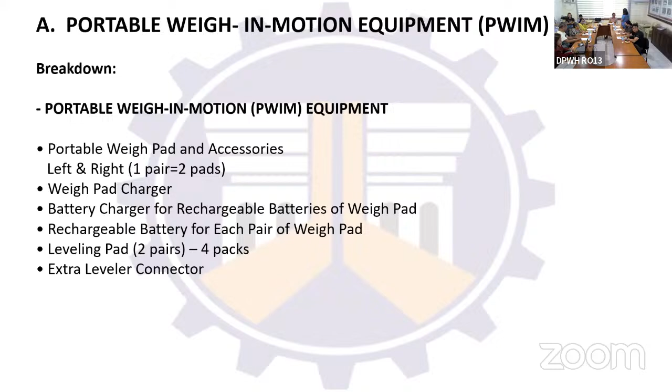ABC: 5,661,334 pesos. Portable Weigh in Motion Equipment, PWIM, specification is shown in the slideshow. Portable weigh control console and other accessories as shown in the slideshow. Laptop with WIM software, accessories as seen in the slideshow.

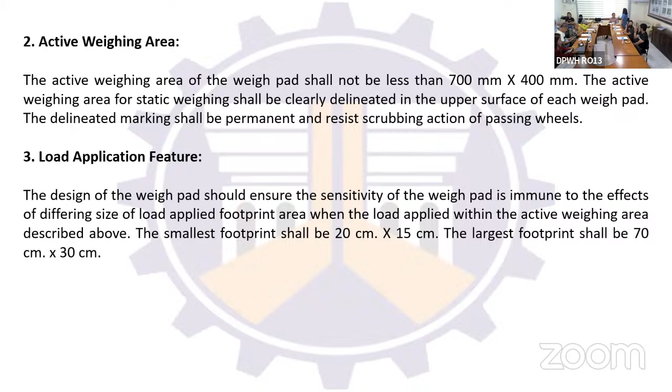Specification for portable weighing scales: weighing pad size, active weighing area, load application feature, weighing readiness, static and dynamic weighing, weigh pad levelers, connection to readout unit, weighing readout display as shown in the slideshow.

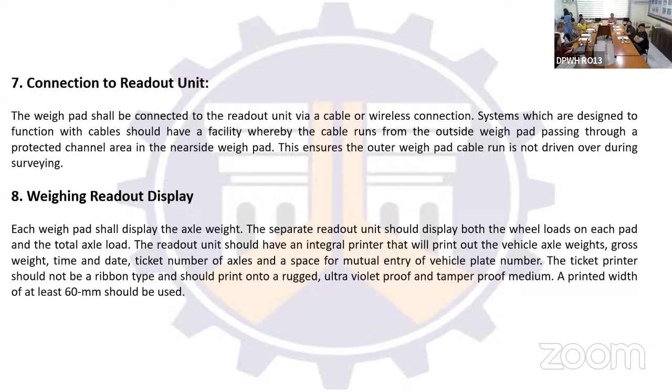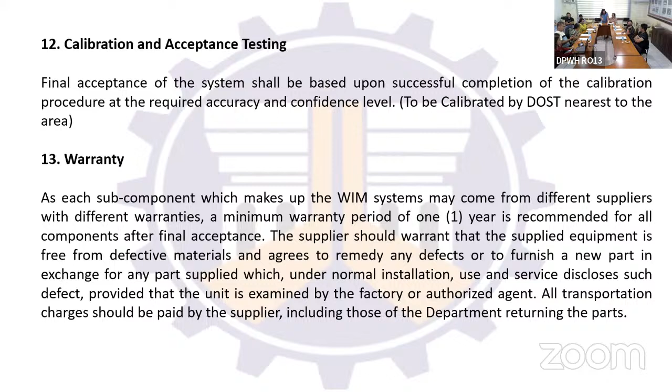The following are the minimum requirements for the readout unit: the printed information ticket, the data storage and communication facilities, the battery supplies, the delivery, storage and handling, the calibration and acceptance testing, the warranty. Note: total amount is inclusive of VAT.

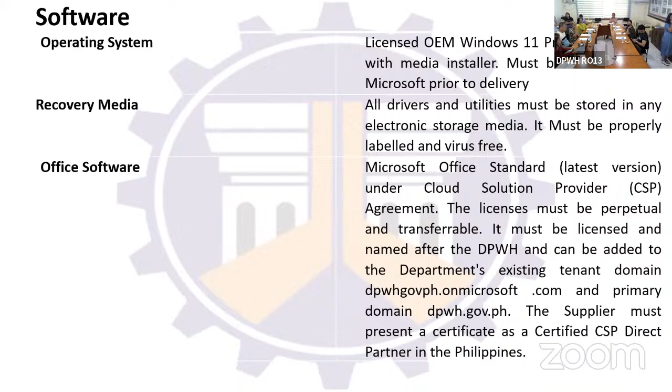Specification of laptop computer for administrative use as shown in the slideshow: software, accessories, and other requirements. That's all, thank you.

D24GN0007. Supply of diesel fuel.

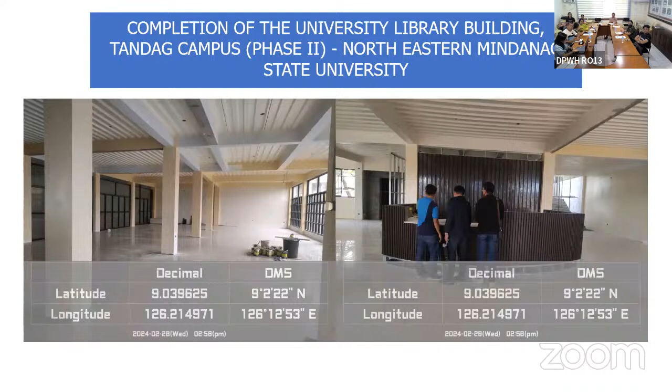This is the perspective of the university library and the actual site construction, including the vicinity map, site development map, ground floor plan, second floor plan, front elevation, rear elevation, right side elevation, and left side elevation.

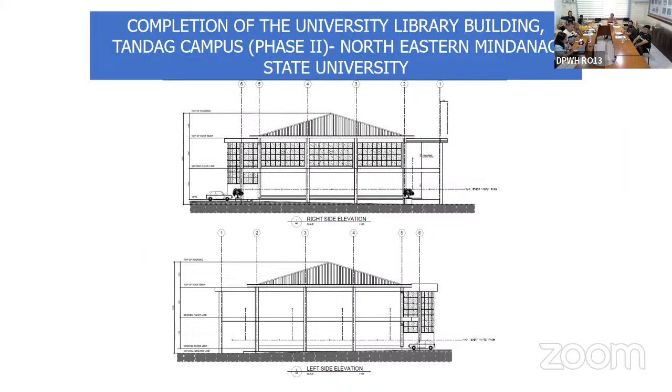Phase 2 schedule of doors and windows, second floor reflected ceiling plan, foundation plan for the extended PWD toilet, second floor framing plan, roof beam framing plan, and for the powerhouse, structural details.

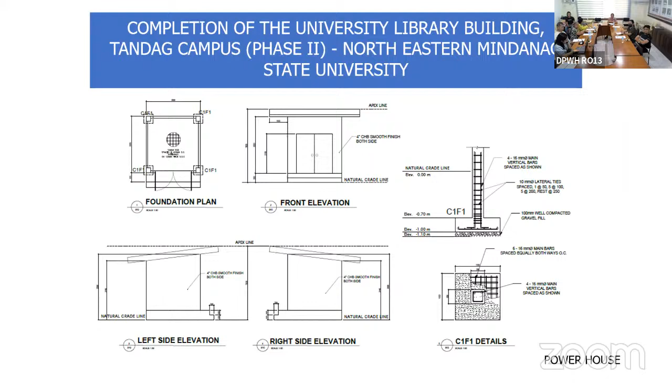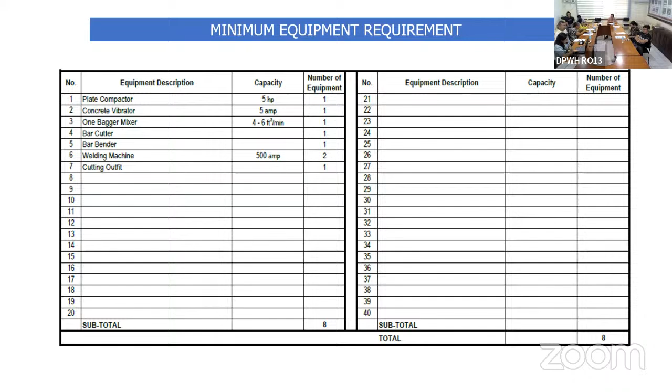Summary of quantities: we have part A, part B, part C, part D, part F, and part G. And for the minimum equipment requirement. That's all, thank you.

Any questions for this ID 24N00188?

So we do not have questions for this project. We proceed with ID 25N00004, Maharlika Highway, Agusan, Davao Section, station K1288 plus 979 to K1290 plus 000.

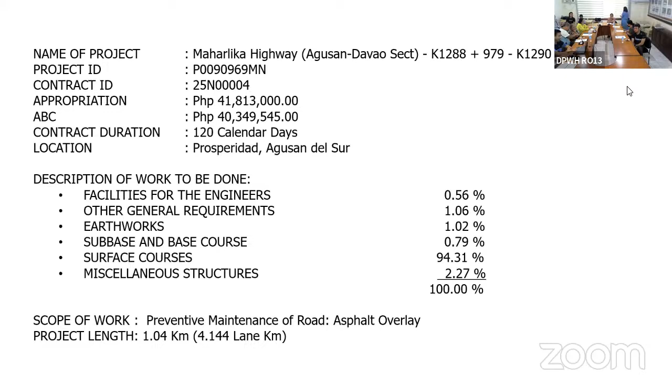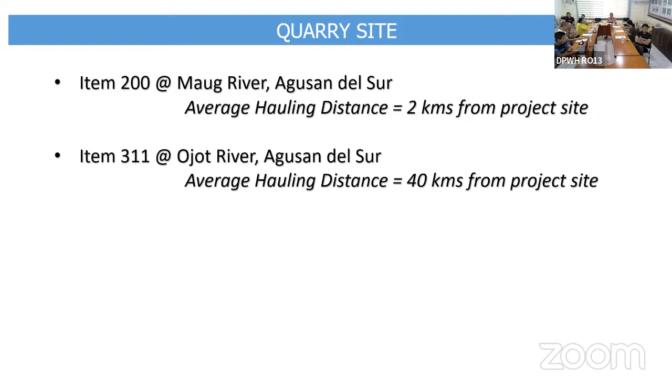The minimum equipment requirements. The quarry site, item 200 will be located in Maug River, Agusan del Sur, with average hauling distance of 2 kilometers from project site. Item 311 will be at Ojot River, Agusan del Sur, with average hauling distance of 40 kilometers from project site.

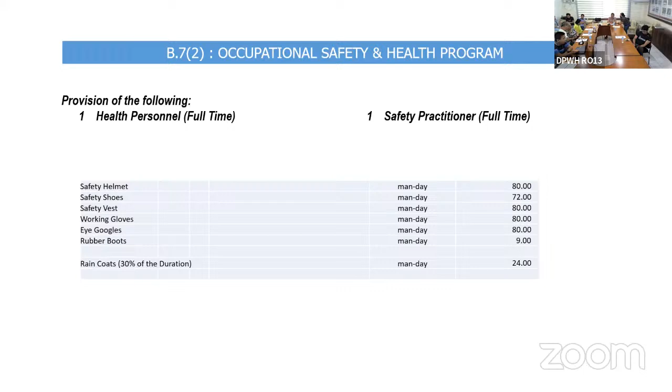Breakdown of facilities for the engineers: provision of field office for the engineers, provision of furnitures, fixtures, equipments, and appliances for the field office, operation and maintenance of field office for the engineer, project billboard, occupational safety and health program, traffic management.

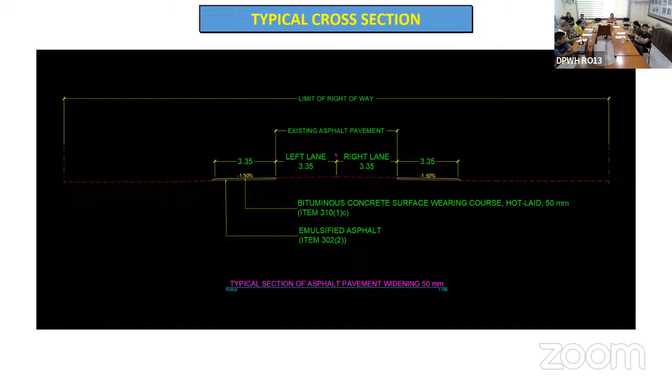That would be all. Thank you. Okay.

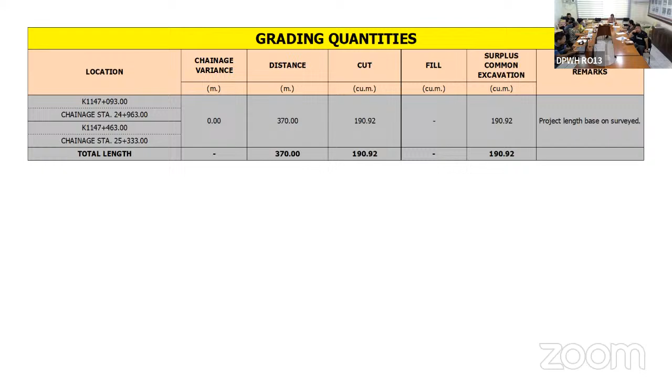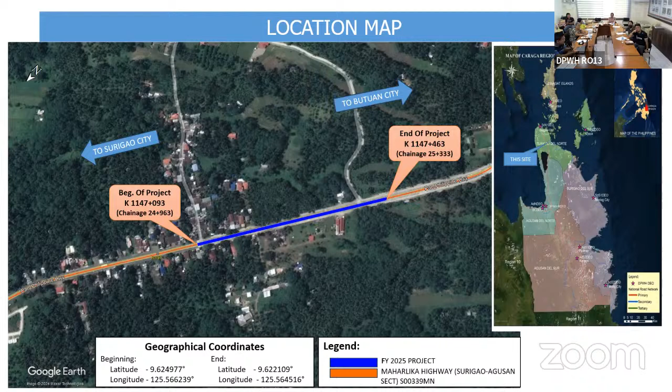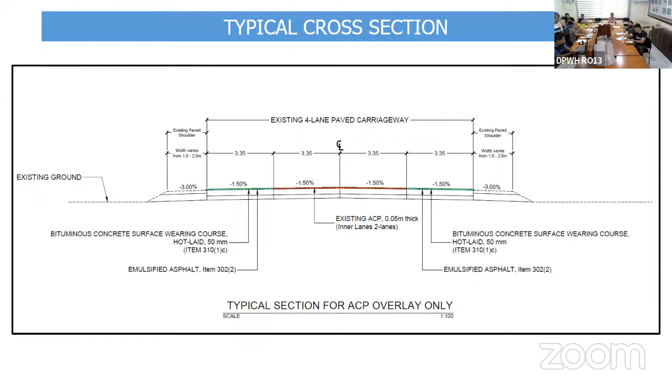The minimum equipment requirements. The location of the project, a location map. The typical cross-section for roads with reblocking and asphalt overlay. The typical cross-section for asphalt overlay only. The typical cross-section for asphalt overlay with paving fabric, installation for section with minor scaling. The straight line diagram.

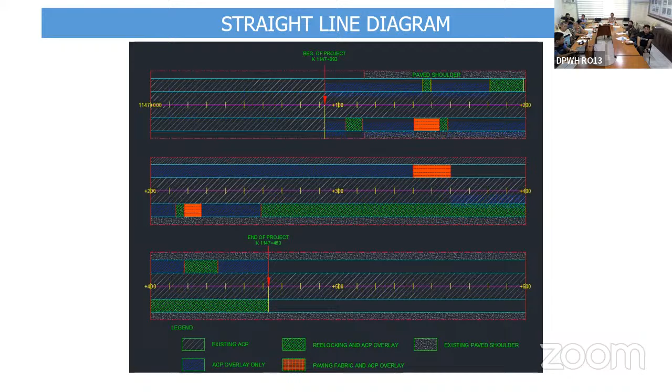The requirements for facilities for the engineers: provision of field office for the engineers on rental basis, provision of furnitures, fixtures, equipment and appliances for the field office, operation and maintenance of field office for the engineer, project billboard, occupational safety and health program, traffic management. Thank you.

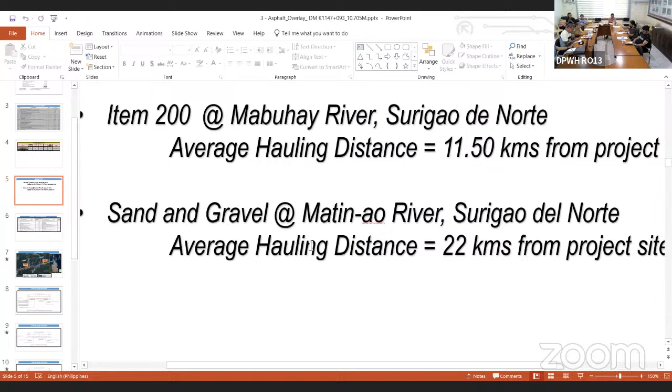The schedule for the bidding is October 24, so that gives them time from now. It's possible to make changes today. Inform them if there are changes needed, so we can issue a bid bulletin. It has still to be approved - the revised POW. Okay, any questions? Online and on site? Okay, so none, we continue. We proceed with ID 25. Thank you, sir, Engineer Bulat. Please proceed with ID 25 and 00070.

The fourth civil works project for roads: construction of bypass road, Bunawan to Veruela to Santa Josefa, Agusan del Sur. Project ID P009358381MN, contract ID 25N00070, appropriation 35 million, ABC 33,775,000, with a contract duration of 180 calendar days. Location: Santa Josefa, Agusan del Sur. Description of work for CW1: facilities for the engineers, 0.93%.

Other requirements, 1.57%. Earthworks, 56.41%. Sub-base and base course, 5.61%. Surface course, 14.58%. Drainage and slope protection structures, 1.96%. Miscellaneous structures, 3.14%. For CW2: earthworks, 0.28%. Drainage and slope protection structures, 15.52%, with a total of 100%.

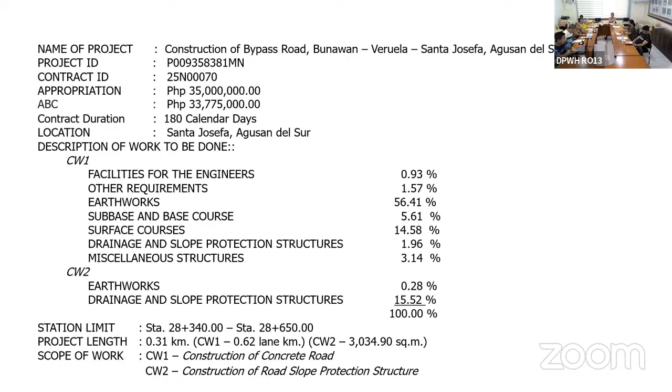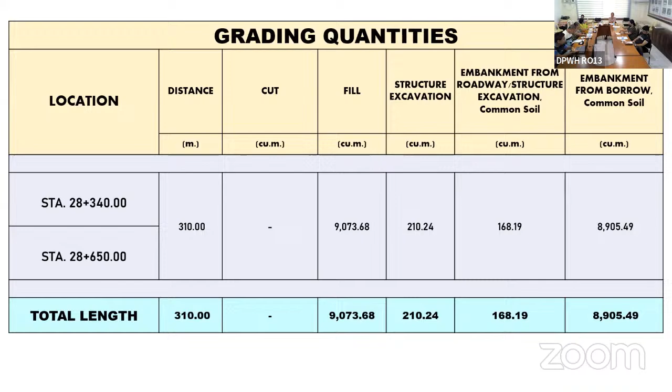This is the summary of quantities for CW1 and CW2. The grading quantities. The location map of the project.

Quarry sites: item 104 will be located at Candiis Mountain Quarry, Agusan del Sur, with average hauling distance of 15 kilometers from the project site. For items 200, 300, 505, 506, at Salvacion Bahayan River, Agusan del Sur, average hauling distance of 22 kilometers from the project site. Sand and gravel at Agusan River, Barangay Patrocenio, Agusan del Sur, average hauling distance of 11 kilometers from the project site.

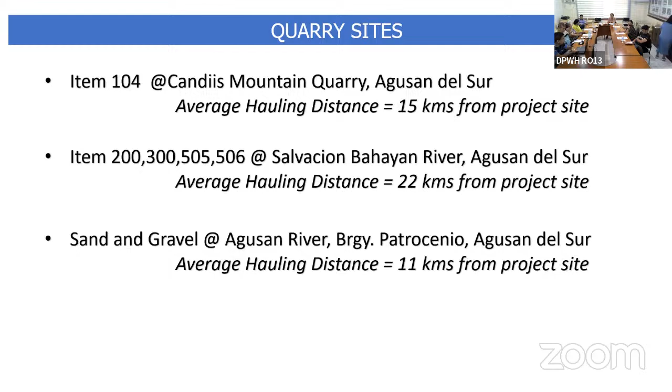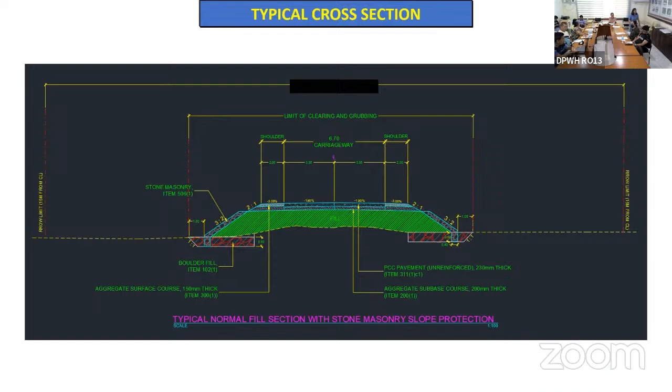The minimum equipment requirements. The breakdown for the facilities for the engineers: provision of field office for the engineers, provision of furnitures or fixtures, equipments, and appliances for the field office for the engineers, operation and maintenance of field office for the engineer, the project billboard, the occupational safety and health program, traffic management, the typical cross-section, which is a typical normal fill section with stone masonry slope protection. The traverse and profile. So thank you.

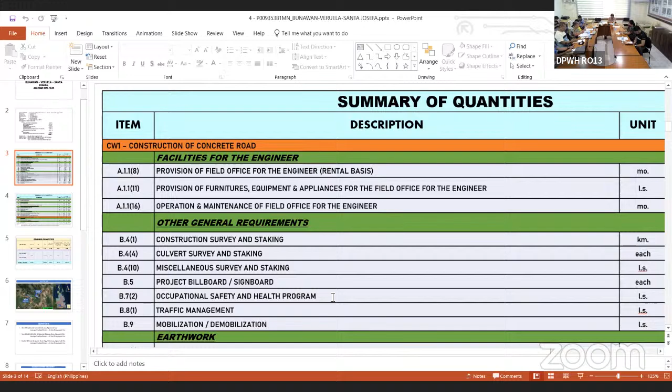Any questions from our board members? This is ID 25 and 0072, from our prospective bidders online and on-site. So, none, no questions. So thank you, sir. We continue with ID 25N00140, Bonbon Libertad Bypass Road.

Who will present? Bypass.

The fifth civil works project for roads: Bonbon to Libertad Bypass Road, Butuan City, with a project ID of P00910-108MN, contract ID of 25N00140, with appropriation of 40 million: 10 million for the off-carriageway, and 30 million for the right-of-way. ABC: 38,600,000; 9,650,000 for off-carriageway, 28,950,000 for the right-of-way. Contract duration of 90 calendar days, and the location of the project will be at Butuan City, Agusan del Norte. Description of work to be done.

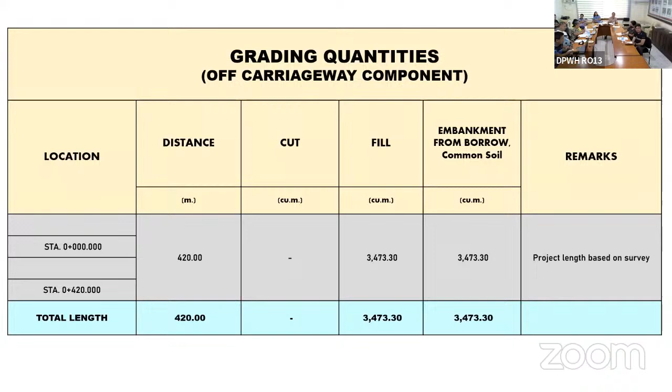Quarry site, sand and gravel will be at Kabadbaran River, Dinabukan section, with average hauling distance of 40 kilometers from project site. Item 1042A at Bonbon Mountain, Butuan City, average hauling distance of 6 kilometers from project site. Boulders at Tagibo River, Butuan City, average hauling distance of 21 kilometers from project site.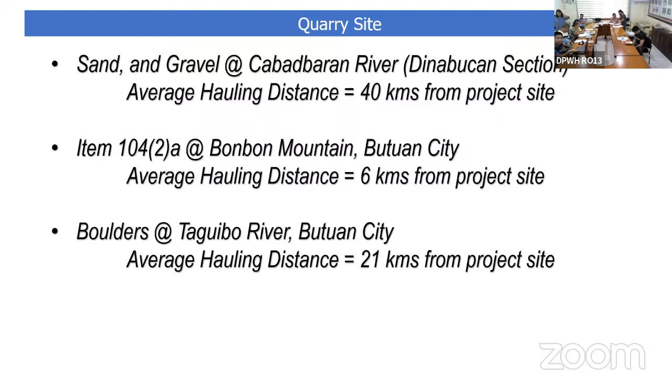Breakdown for the facilities for the engineers and other general requirements: provision of field office for the engineers, rental pieces, provision of furnitures or fixtures, equipments, and appliances for the field office. Operation and maintenance of field office for the engineer, project billboard, occupational safety and health program, traffic management.

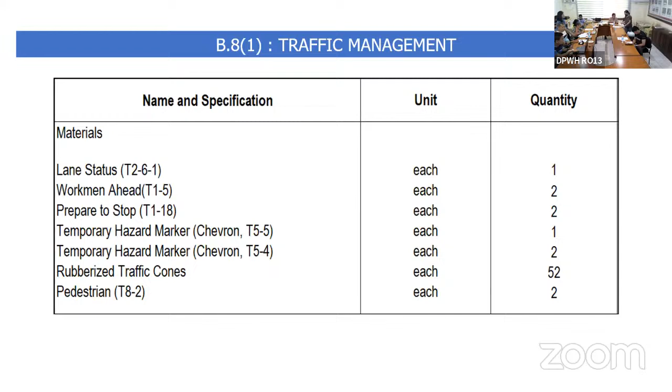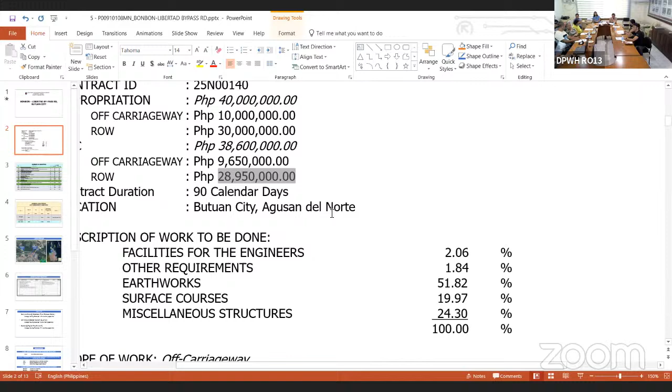Thank you, ma'am. Number 8.

For the next project, 24N00147 Patinay Bridge 1, B01739MN along Maharlika Highway, Agusan, Davao section. Project ID P00909984MN, appropriation 15 million, ABC 14,475,000, location Patinay, Prosperidad, Agusan del Sur. Contract duration 120 calendar days.

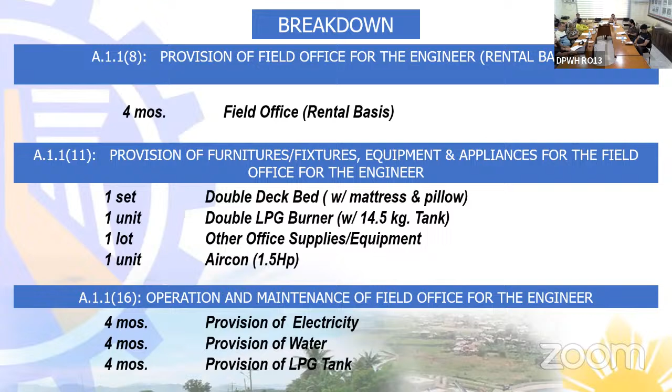For the breakdown, for the minimum equipment requirement, quarry site, item 104 and 200 at Maug River, San Salvador, with an average hauling distance of 13 kilometers from project site. And item 311-405 at Maasam, Agusan del Sur, with an average hauling distance of 56 kilometers from project site.

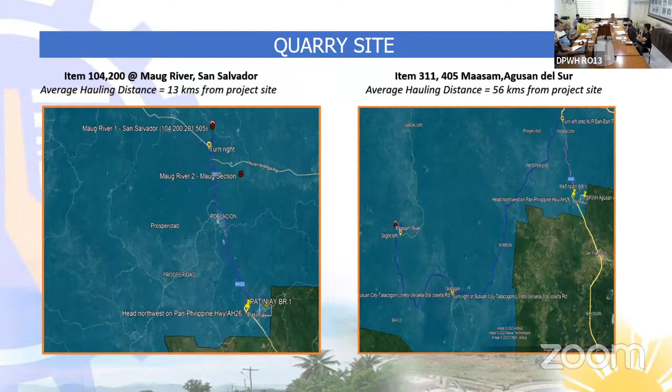Location map. For the general elevation. That's all.

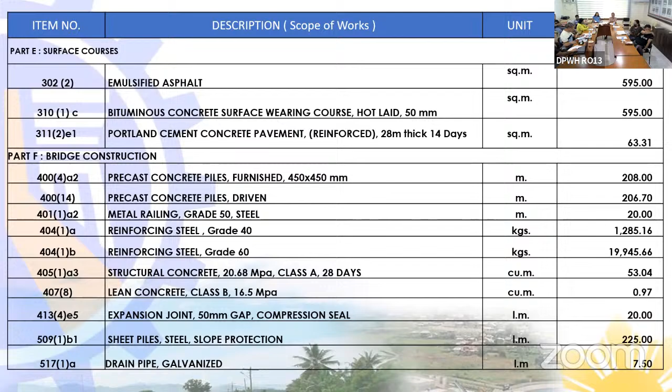Do you have questions from our participants, prospective bidders for Patinay Bridge 1? Okay, no question. So nag-iisa lang pala ang ating prospective bidder. Wala sa online, no? For Patinay 1, Bridge 1. Sa gawas, wala.

Members, any question, TWG? So, no questions. Next project, we have 25N00176, Simula Bridge.

For the last project, 25N00176, Simula Bridge, B00928MN along Maharlika Highway, Agusan, Davao section. Appropriation with 50 million, ABC 48,250,000. Location Bunawan, Agusan del Sur. Contract duration 210 days.

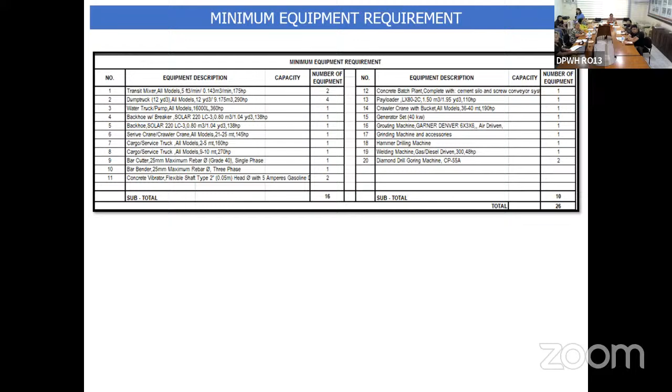Scope of work: rehabilitation, major repair of bridge at span 1 and 2 and first bridge approach. For summary of quantities, for the breakdown, for the minimum equipment requirement, bridge type, for the general elevation.

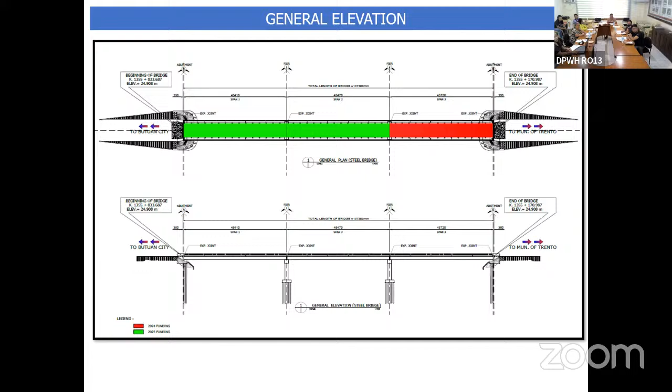Red ma'am is ongoing 2024. Yes ma'am, 2024. Training plan.

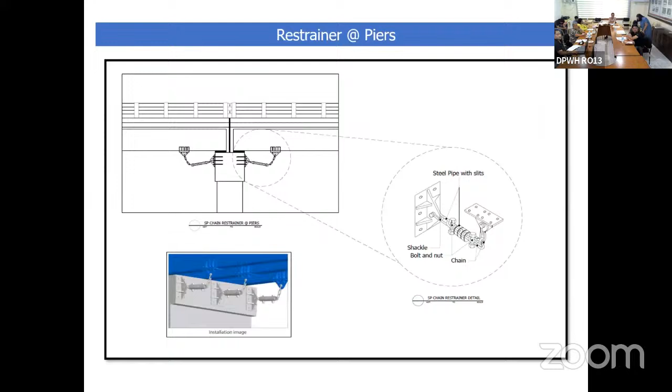This training. For the quarry site, Simula River, item 200 and 300, sand and gravel with average hauling distance of 19 kilometers from the project site. And for item 500, 505 and 506, Salvacion Bahayan River with average hauling distance of 22 kilometers from the project site.

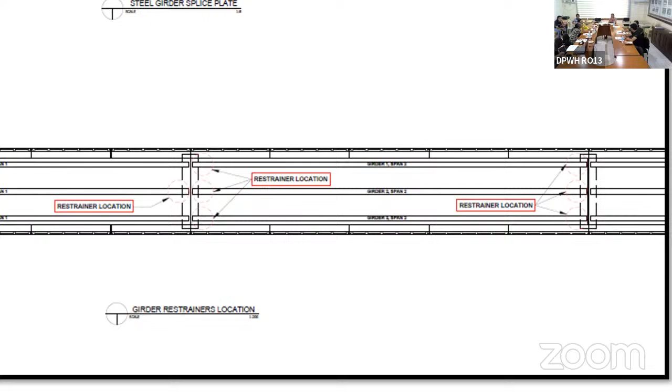Any questions from the body? None I guess. Ma'am, good morning.

Okay, from our online participant. I'm particularly interested in item 424-1, ma'am, the chain type bridge seating prevention restrainer.

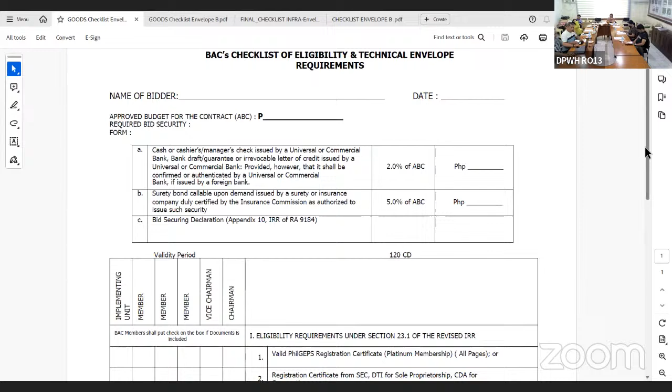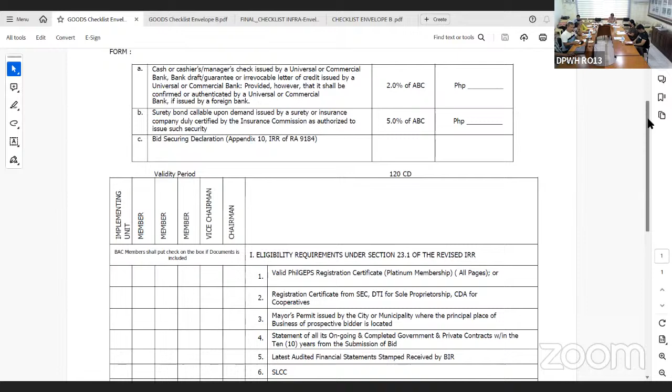the first requirement is the bid security, either in the form of cash, cashier's or manager's check issued by a universal or commercial bank, or bank draft or bank guarantee or irrevocable letter of credit issued by a universal or commercial bank for not less than 2% of the ABC. Or it can be a surety bond, callable upon demand, issued by a surety or insurance company, duly certified by the Insurance Commission, as authorized to issue such security, for not less than 5% of the ABC, or it can be a bid securing declaration.

For the eligibility requirement, this is for goods. Number one is a valid PhilGEPS registration certificate. It should be platinum membership. Number two is registration certificate from SEC, DTI for sole proprietorship, or CDA for cooperative; mayor's permit issued by the city or municipality where the principal place of business of the prospective bidder is located.

Number four is a statement of all its ongoing and completed government and private contracts within 10 years from the submission of bid. Number five is the latest audited financial statement stamped received by BIR. Number six is SLCC. Number seven is NFCC computation or credit line commitment. Number eight, valid joint venture agreement if they are engaged in a joint venture. And number nine is tax clearance.

For the technical document requirement, the bid security was already discussed. Number two is the conformity with the technical specification as enumerated and specified in Section 6 and 7 of the bidding documents. Number three is the omnibus sworn statement in accordance with Section 25.3 of the IRR of RA 9184, using the form prescribed in GPPB Resolution number 16-2020.

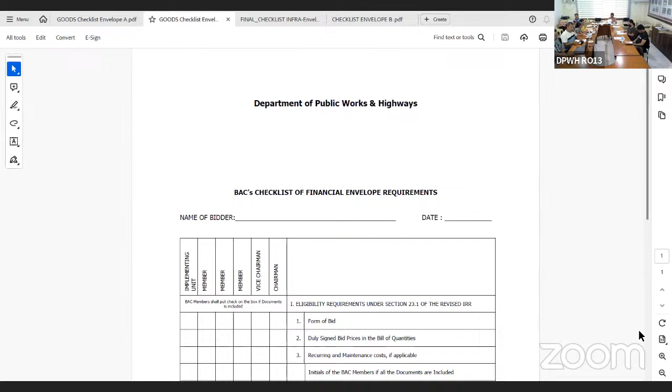For the financial requirement, number one is the bid form or form of bid. Number two is the duly signed bid prices in the bill of quantities. Number three is recurring and maintenance cost, if applicable. Take note again that any missing document in the above mentioned checklist is a ground for outright rejection of your bid.

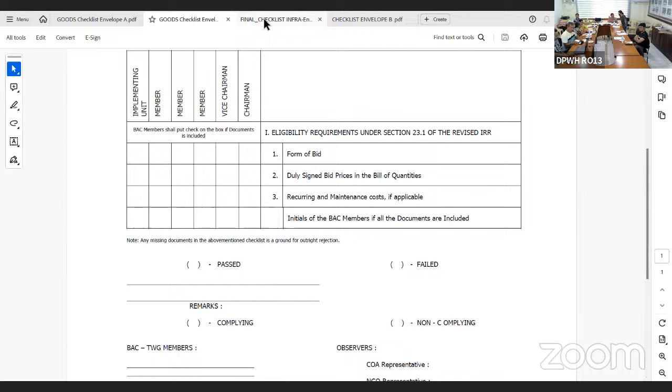For the infrastructure project, the following are the requirements. Number one is a PhilGEPS certificate of registration or membership; it should be platinum. Number two, if not enrolled in CWE, the following Class A and Class B documents not covered by PhilGEPS certificate should be submitted: number one, PCAB license and registration; number two, a statement of all ongoing government and private projects; number three, SLCC; number four, NFCC computation and a statement of total assets and liabilities; number five, a joint venture agreement, if applicable.

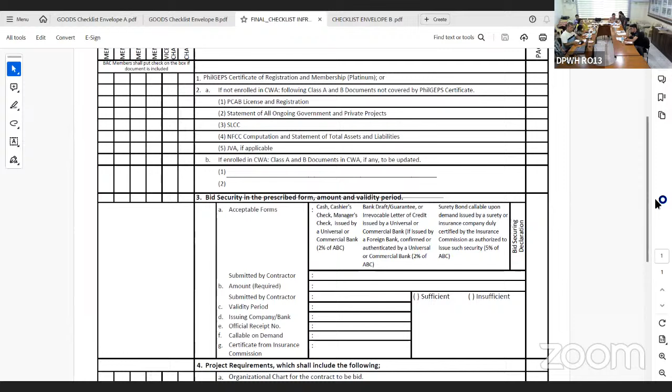If you are not enrolled in CWA... if you are enrolled in CWA, you should update your records in the central office in the Civil Works Registry.

For the bid security requirement, the following are the acceptable forms: it can be cash, cashier's check, or manager's check issued by a universal or commercial bank for not less than 2% of ABC. Or it can be a bank draft, bank guarantee, or an irrevocable letter of credit issued by a universal or commercial bank for not less than 2% of ABC. Or it can be a surety bond callable upon demand issued by a surety or insurance company duly certified by the Insurance Commission as authorized to issue such security, for not less than 5% of ABC, or it can be a bid securing declaration.

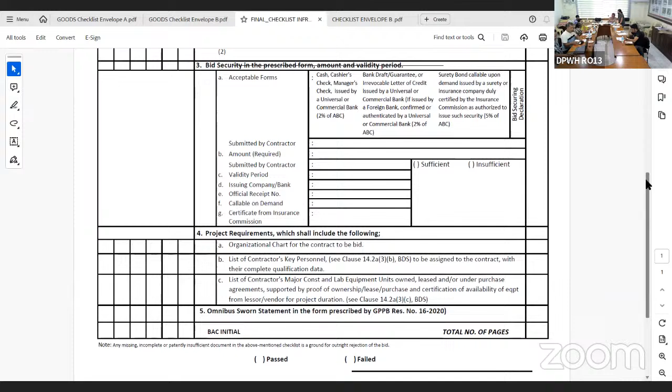For the project requirement, this includes the following: Letter A, organizational chart for the contract to be bid. Letter B, list of contractor's key personnel to be assigned to the contract with their complete qualification data - see Clause 14.2(a)(3)(b) of the bid data sheet. And Letter C, a list of contractor's major construction and laboratory equipment units, either owned, leased, or under purchase agreement, supported by proof of ownership, lease, purchase, and certification of availability of equipment from lessor or vendor for the project duration - see Clause 14.2(a)(3)(c) of the bid data sheet.

And number 5 is the omnibus sworn statement as prescribed by GPPB Resolution number 16, series of 2020. Take note that any missing, incomplete, or patently insufficient document in the above mentioned checklist is a ground for outright rejection of your bid.

For the financial component of your bid, the following are the requirements: number 1 is a duly signed financial bid form in accordance with the prescribed form in Section 9 of the bidding forms. Number 2 is duly signed bid prices in the bill of quantities. Number 3 is duly signed detailed estimates, including a summary sheet indicating the unit prices of construction materials, labor rates, and equipment rental used in coming up with the bid. Number 4 is a duly signed quarterly and monthly cash flow and payment schedule. Any missing, incomplete, or patently insufficient document in the above mentioned checklist is a ground for outright rejection of your bid.

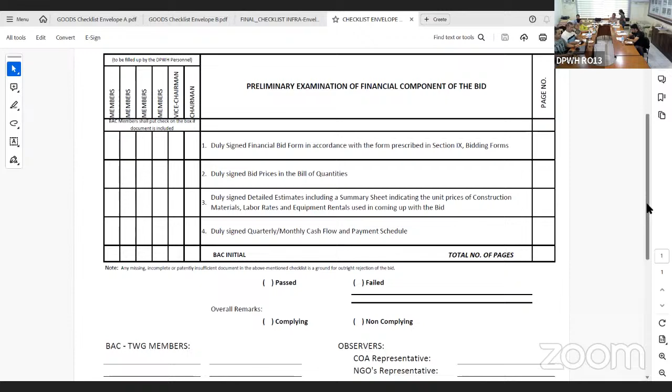The contractor is also reminded that the requirement is not limited to the checklist, but also to the provisions of RA 9184 and the GPPB resolution. So that's all, ma'am.

Thank you, Engineer Enris. Any questions from the body, board members, or TWG? Do we still have online participants? None so far, ma'am, no questions, we're just waiting for Engineer Saldi Enris to announce the bidding results.